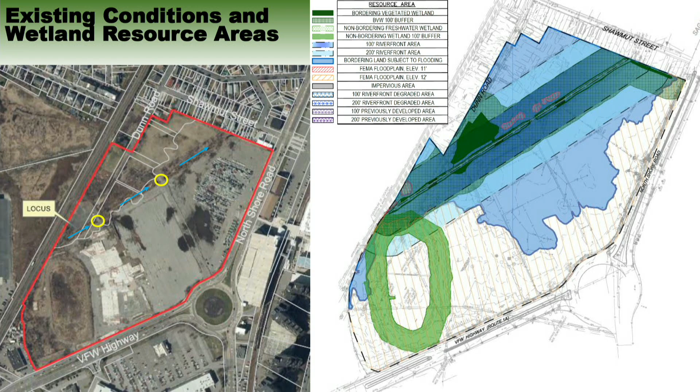So on to the proposed project here. As you see, VFW Parkway and North Shore Road and Butler Circle have all shifted to the bottom of the screen, so north is in the right direction of the screen.

You see the big white building in plan left, or the southern portion of the site. That is a podium-style building for the school, serving grades 9 through 12. Beneath the building is at-grade parking with a base elevation of 4, and the first floor elevation above that garage is elevation 19, about 7 feet above the current 100-year floodplain. That's an effort to have the first floor elevation above the floodplain and also allow floodwaters to flow beneath the school building during a 100-year flood event.

As you can see from VFW Parkway and North Shore Road, we have 2 proposed site entrances at the existing traffic lights at both of those roadways. The internal driveways loop throughout the site, providing access to the school and a series of surface parking lots.

The parking lot to the right of the school, between the school and the athletic field, has electric vehicle charging stations. The parking lot to the left, in the southern portion of the site, has additional electric vehicle charging stations. There are also more proposed in the garage underneath the school, with a total of 69 spots being accommodated for EV charging.

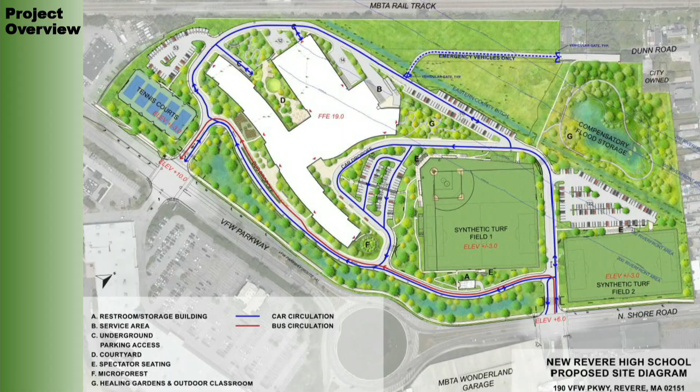Just wanted to give an example of one of the plan sheets. This is a courtyard proposed to the rear of the school. You see the school building outlined in red, and the southern portion of the school is where all the classrooms are - the extension wings of the school building. On the north side is, I believe, the gymnasium. Between that, there's a nice courtyard with a lot of plantings that I highlighted in that green polygon color. I wanted to give the commission members and any viewers a feel for the level of revegetation that we're proposing at this site.

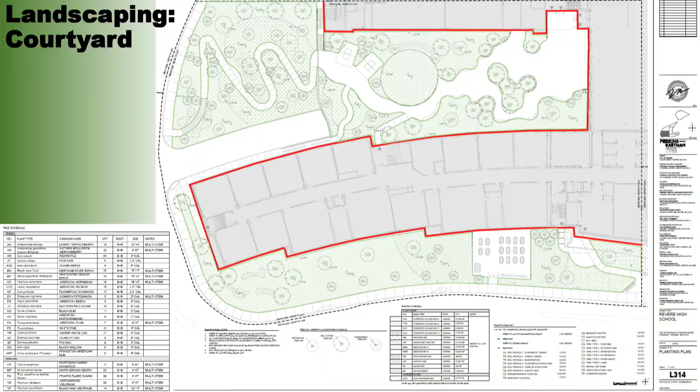Additionally, this is the natural outdoor classroom that I pointed out on the plan, on the opposite side of the Eastern County ditch from the athletic fields.

Some of the notable features I wanted to point out: the bottom left image shows one of the proposed boardwalks, 6 feet wide, crossing over some of the lower lying grades of this compensatory storage area. There are about 2 more boardwalks proposed, to allow floodwaters to enter and recede from this compensatory flood storage area from the Eastern County ditch beneath the boardwalks.

We also have the walking paths, again 6 feet wide, comprised of a composite sand that adheres to itself, so in a flooding event it would not dissipate or spread out. It would still function as a pervious area, so it's a good balance for environmental protection there.

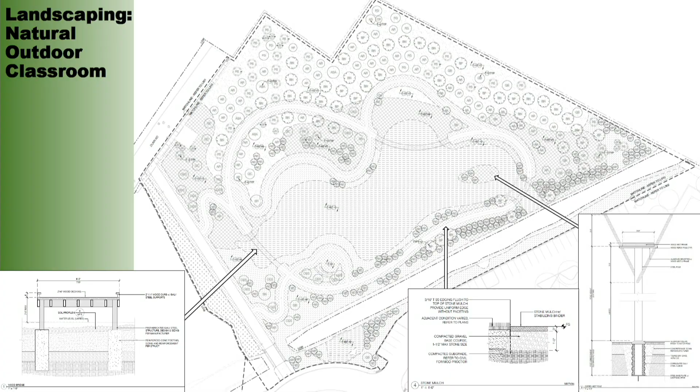And then lastly, a bit of wildlife mitigation is provided. The image on the bottom right with the arrow pointing to the deepest pocket of this compensatory storage area is a proposed osprey nest that will be constructed there. So it adds wildlife value, educational value, and overall passive recreation for folks coming to bird.

With that, I'm going to pass the stormwater discussion over to Dave for a moment.

Thank you, Claire. My name is David Conway, I'm a civil engineer for Niche Engineering in Boston. I'm presenting tonight, but I'm part of a team of about 7 engineers at Niche who've worked on this to pull together the documentation, calculations, and plans for the civil side of this project, along with Claire's team for permitting and the landscape architectural teams, working in conjunction to make this all happen.

Claire has mentioned several times for me to be brief. I'm going to talk about the stormwater in a somewhat narrative form. The materials you provided, the stormwater report, is over 400 pages. In the beginning we have a very detailed discussion about how we're meeting each stormwater standard, in addition to the stormwater form itself where you're just checking boxes, but we also have a narrative that goes through that. I'm going to talk about it a little more holistically, and you're free to ask any questions.

But the big move that was made very early, so that we could ensure we got a school the city would be proud of and would like, a healthy school, and that we would also meet all the regulatory requirements for stormwater and other resource areas, is by greening the site. The site has a lot of pavement on it right now. We are reducing the amount of impervious surface on this site by 6.5 acres. Just doing that, we're going to improve the stormwater rates coming off the site, greatly improve the recharge of water going into the site, and reduce the volume of stormwater coming off the site.

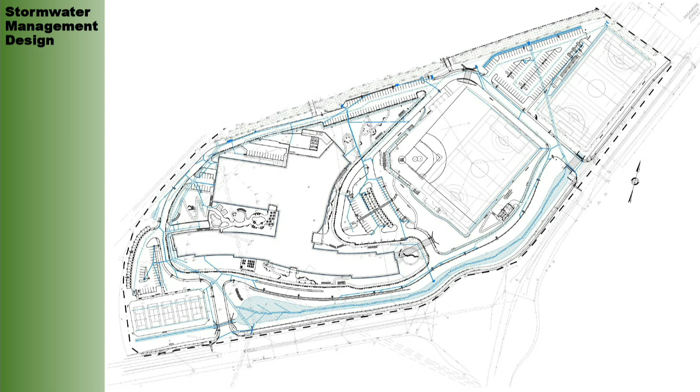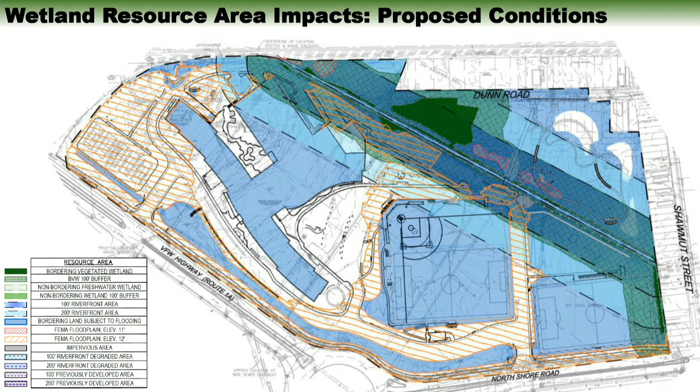The next couple of slides break out all of these resource areas so we can get a better grasp on everything. This first one shows the buffer zone impacts and the impacts to the non-bordering freshwater wetland, or isolated wetland, within the dog track. On the left of these images you'll see existing conditions, on the right the proposed. You can see the school building itself is partially within that isolated wetland footprint. That's something we came to the commission in August 2024 to discuss, going over mitigation commitments the team was prepared to provide to mitigate the permanent impact of that wetland, which I'll touch on at the final slide.

What you see in the dark green hatched line work is a portion of the school. Some internal driveways and parking areas are also within the buffer zone, but notably we have an outdoor learning classroom with a diverse landscape planting plan, replacing a lot of invasive non-native species. We have Phragmites growing into the meadow there, Japanese knotweed, multiflora rose, Asiatic bittersweet - a lot of those within the limit of work will be removed as a result of the project and replaced with this diverse planting plan. Also, on the east side of the Eastern County Ditch, a reduction in impervious area within the buffer zone should be an improvement to the conditions.

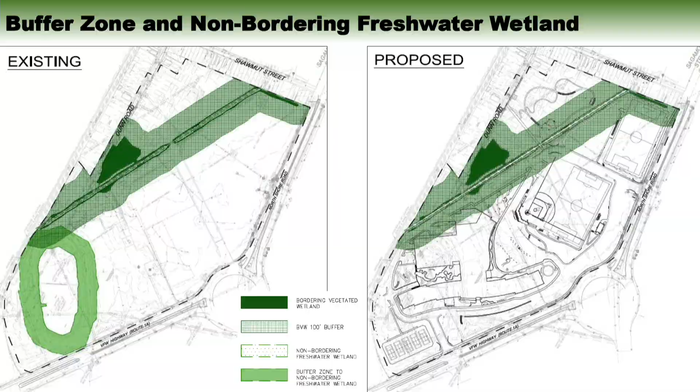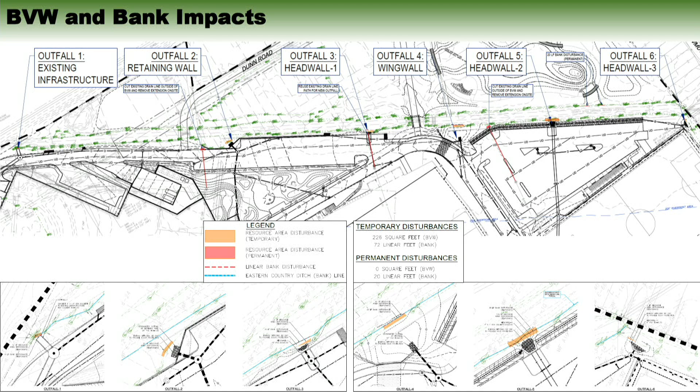So that's 20 linear feet of impacts. It does exceed the regulatory threshold for bank impacts, so we provided a wildlife habitat evaluation within the notice of intent application to comply with that standard.

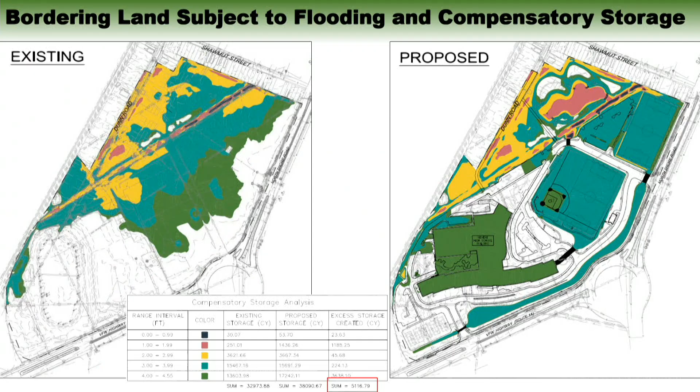When it comes to the riverfront area, that's a really good point, that in a lot of cases you can't build within that first 100 feet. But an interesting component about this site is that it has these three layers of riverfront area split out for regulatory compliance: degraded, which would be areas lacking topsoil, like pavement or gravel.

So when you're dealing with work within degraded riverfront area, the goal of achieving compliance with the performance standard is to not do any more work, or to not increase the degraded area within that riverfront area. And we really go into detail on that in the report.

So if it's easier, I can pull that text out and put it into a more condensed couple of pages rather than having you guys dig through the big document.

So I guess that's kind of my point too. I saw that and know that's obviously a law, but you explained degraded versus non-degraded—this is the first time I'm hearing about degraded versus non-degraded. So my review is going to be meaningless if I can't pull stuff like that out of the report.

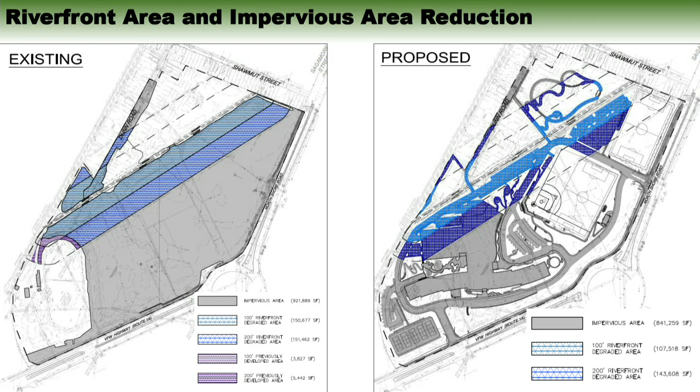This really is in conservation, but it's a curiosity more than anything. You have many areas that are designated as garden areas, and I forgot the term that you used—the natural outdoor classroom. Are they going to be lighted?

That's a great question. I don't think the natural outdoor classroom is. I'll let Emmett speak to that—he's been working on a lot of these gardens here.

Some of the major pathways will be lit for safety reasons and for circulation, but the further you get away from the building, the areas that are meant to be more natural will not be lit and are not intended to be occupied after hours. The main circulation pathways will be lit to safe levels.

Can I assume that D is going to be lit? It's in between buildings? Correct, yes. And not G? Not G, right. Thank you.

So, to one of Tom's points with the 100-foot buffer zone, and what I expressed while we were on site about what kind of treatment you'd be applying to these impervious surfaces—the parking areas that are close to the ditch—having upgrades like not using sodium chloride and things of that nature, only because I'm sure you would want to maintain the roadway that goes around the building.

It is a lot to really wrap our brains around. And I feel that we definitely need to, if you agree, continue this to really have a good look at it—have a discussion offline about how we might want to proceed with a peer review or third-party peer review of this, just to give it a little bit more.

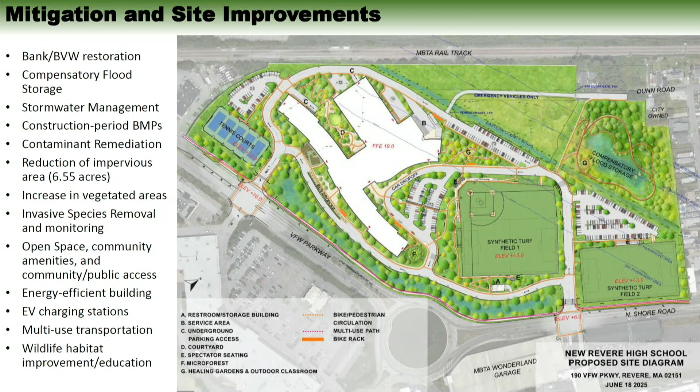Thoughts, please. Well, I think that it's overkill at this point, my personal opinion. I do understand having the additional reviews, but with the fact that they've gone through MEPA, the fact that they have a lot of eyes on them, they've done all these reports, I just feel at this point that we should be good, but I respect your opinion as chair.

I respect the opinions of others on this commission, and I don't think it could hurt anything to do the extra reviews. I just am somebody that is cost conscious, even though I know how much money this thing's going to cost—I just think it's going to cost additional money and time for the additional review. I personally think it's overkill, but I will respect the opinion of the rest of the commissioners for what they decide. My personal opinion would be that we should be good to move forward, but I will again respect what everyone else wants to do.

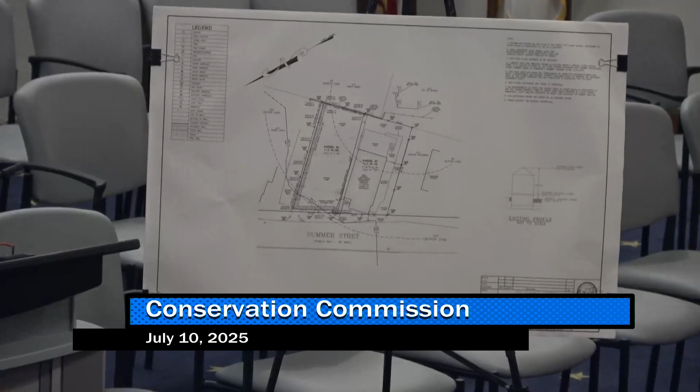Good evening, Ryan Rosine with Goddard Consulting. As you might remember, we were before you last year for the demolition of the detached garage, shed, and filling in of the in-ground swimming pool, and construction of the new retaining wall along the actual property line, giving back the neighbor a portion of their driveway.

We submitted the as-built plan, as you can see here. This here is the wall along the three sides, along the property line, so it's been restored to the property line. This whole interior area where the swimming pool was is now lawn. It's fully grown in, no concerns with erosion. That's pretty much it. I know a couple members were there earlier this week and saw it.

In the original plan, there was supposed to be a small retaining wall on this side that was not constructed. It was deemed that wall, which is a short wall, 1 to 3 feet or 2.5 feet max, didn't actually need to come down, so that was not put in.

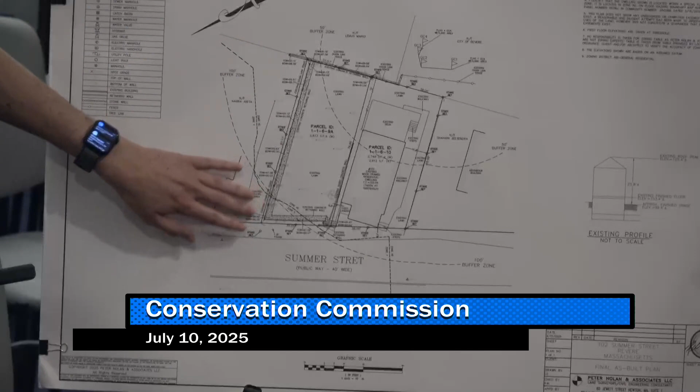The large retaining wall here is about 7 inches higher than what was originally proposed on the plans. That's a minor deviation that we feel has no negative impacts on the resource areas. So I'll turn it over to you guys if there's any questions or comments.

Thank you very much for meeting with us on site and walking it down. I can definitely confirm to the other commissioners that the site is completely stabilized. Grass has grown in, the retaining wall is up, and the retaining wall on the back with their neighbor is up as well. Where they abut the neighbor behind them and closer to the marsh, that one's all in.

And the driveway on the other side, where they gave back to the other property, is stabilized with crushed stone instead of permeable pavers on that part of the property. So it is all stable. It is the retaining wall. They did what they said they were going to do, aside from the 2 drains that were supposed to be there, but the amount of open space in the blocks, I think, would more than make up for it.

But I definitely have some concerns about the spacing on the blocks and the layout and construction of it. I have some concerns, and I'm sure others who have seen it may have similar concerns. But at this time, I'd like to open up to any other commissioners if they have comments, questions, or concerns.

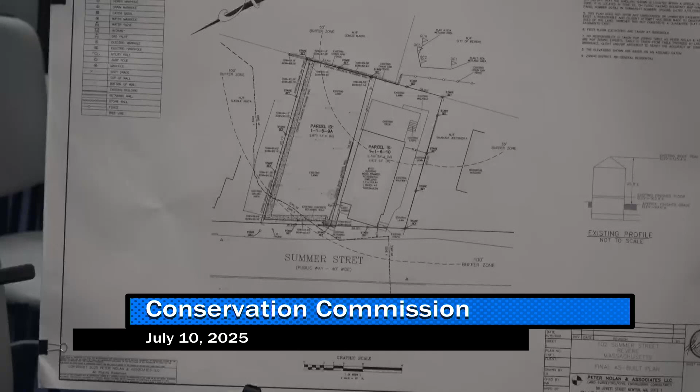Is it there for a reason? Does it drain all the way down to the ground? The blocks below it, the top ones are much more solid and just have that smaller opening at the top. The ones below, like the 2nd, 3rd, 4th levels down, have much bigger openings in the middle, so they're more surrounded and filled with the aggregate. Because those are open from the top, water can percolate all the way down through those most likely.

Well, I wish there was a solution. I would like to not have that be a trash disposal, but you'd want that to be something that's porous too. What if they put wire caps? There's porous concrete too, but I don't know if that would work fast enough.

The wall manufacturer makes a cap, I think it requires a cap. I think the wall manufacturer does make caps for those, but I don't think that was part of the original plan to have them. I don't believe the original plan called for caps on the top, the plan that was approved. Actually, I think I did mention that, but anyway, it's not a big deal, but it is kind of unfortunate.

No, I understand. Yeah, I did see that some of the wall looks beautiful. Yeah, no, I agree, it looks better. But I did see that trash, and it's unfortunate, but it can get cleaned up, and it's something the homeowners might have to deal with occasionally. Yeah, heck, I'd even put something porous and then dirt on it and put some plants there, put some screen so they can't do it.

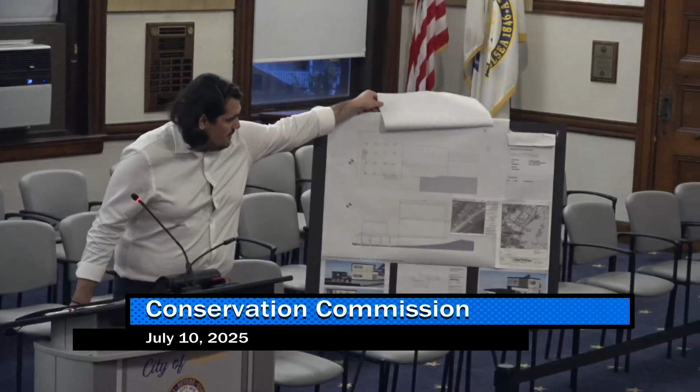Here we have a map from it. And there will be a sediment control barrier to prevent sedimentation. Please let me know if you have any questions.

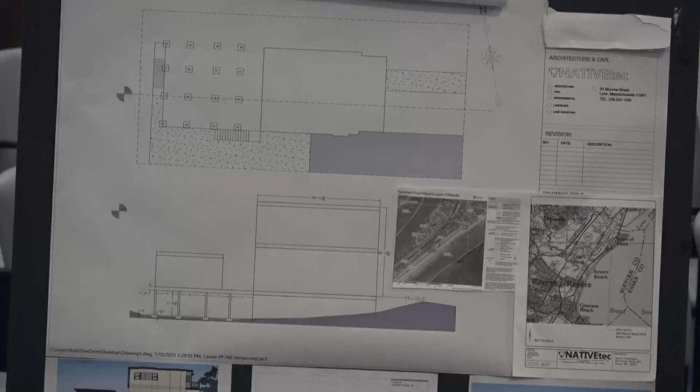So when we were walking down the site, the back of the foundation, the front of the house, you said was 15 elevation. What was the back of the foundation? 6.5. Okay, that's definitely something. And that drawing you have with the curve coming down, that's the one there.

Yeah, if you could point out where the end of the foundation is, please. Where is that at? It's there. Okay, and then the addition, those pilings there, that's where you're going to have your apartment, correct? It will be elevated on the pilings.

Okay, when we walked down the site, was it the building commissioner? I'm not really sure who asked to remove the drains. What is the plan for that, and what kind of excavation do you have to do? They will be removed, both of them. Okay, what's the plan? How are you going to be doing it?

You're in a pretty low elevation, just making sure everything's fine. Do you have an idea of where the drainage system goes? Rob Rainey, NATIVEtec: the drains will be removed, and 4-inch depth of water washed stone will be put down on the expanded footprint.

So the now footprint of the apartment and the deck between - the owner wants to keep a gap between the existing house and the new apartment that's now raised.

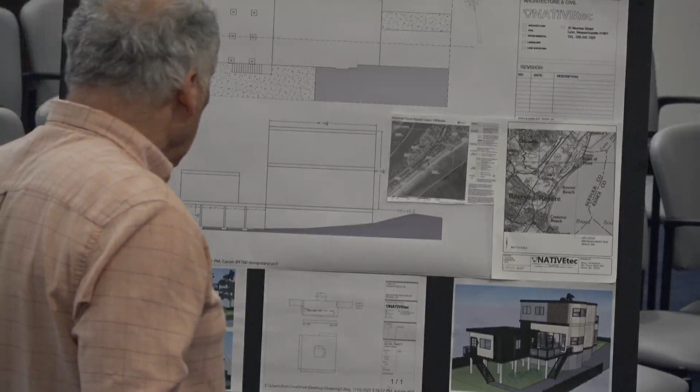The connection between the two? Yeah, so the deck you're building between the apartment and the main house, is that like a shared space? This deck here is the main building, and the apartment would exit here on the other side.

And that'll all be slatted so the water can go right through the deck? Okay, alright, I think that's all the questions I have. Thank you for the elevation update. Any other questions for commissioners?

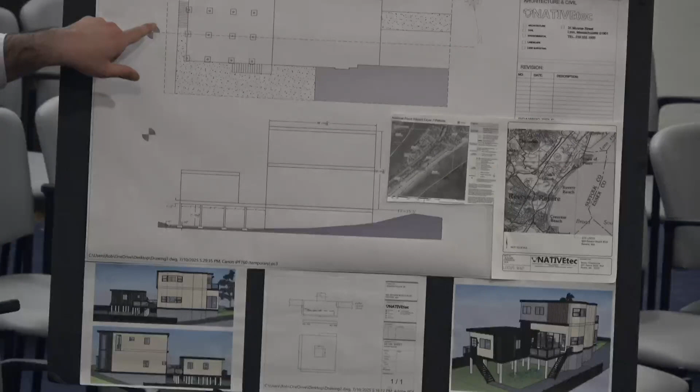Just looking at the drawings of it, is that an ADU in the back? Is that what that is? What are we talking about? So is that, are you filing that as an ADU?

It's been that way, it's been a two-family since she bought it about 4 months, 3 months. If you wouldn't mind going up to the microphone - she bought it about three months ago. So it is currently a two-family? Yes.

Okay, the apartment is part of the current foundation, and it's at ground level in the back, so the elevation of that floor is probably about 6 or so. Now they want to take the apartment away from the main foundation of the house and put it on pilings. I think the way it's connected by the porch, so it's all one piece, instead of being an accessory dwelling unit.

I just have one thing to say - as someone who's lived there, two homes from me was put on pilings, and I was there when they pounded these things into the ground. My home, 2 houses away, shook like crazy, and there was no notification - I didn't know what was going on. I just want to make sure that when you do this, you let the homes around you know this is going to happen, because it was shocking - I felt like I was in an earthquake.

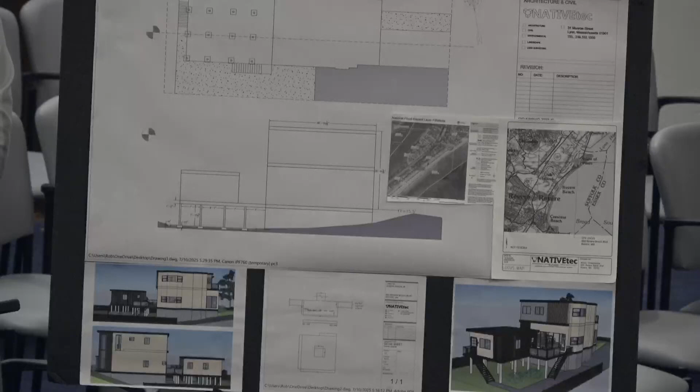Wait, so your foundations aren't even going to be below frost? Is that what you're saying? Well, they're basically like a mat foundation for each one. You're not worried about frost heave? It's basically a mat foundation, and it has a spread to it for that purpose. Okay, I mean, it's not our purview, that'd be building, but interesting.

Okay, any other questions? Yes, go ahead, Mr. Chairman. In the back right now, there's a small porch, correct? Yes. And the foundation you're talking about is not going to encompass that porch at all? No, it won't be passing. As a matter of fact, that porch where it exists now is more or less where the connection is between the front building and the rear building, the same area?

Yeah, as it stands, it has a small porch and an apartment below that is ground level. You can see the windows when you go into the backyard around it. But yeah, they have just an exit way off the back there.

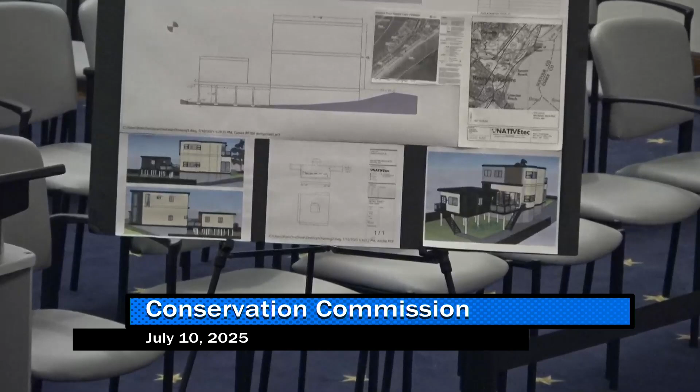And I noticed underneath is green. Is that AstroTurf, or is that just aesthetically put there underneath the addition? It will be sand and... well, it exists as grass. That's grass there now, it's sodded, but it'll be water washed stone. Okay.

And the driveway on the left side of the property when you're facing it, is that going to stay as is, or did you have any resurfacing or repair planned? I didn't see that in the plans. That's all gonna stay as is? It is, yes. Okay, I just wanted to make sure you weren't going to pull a fast one on us again.

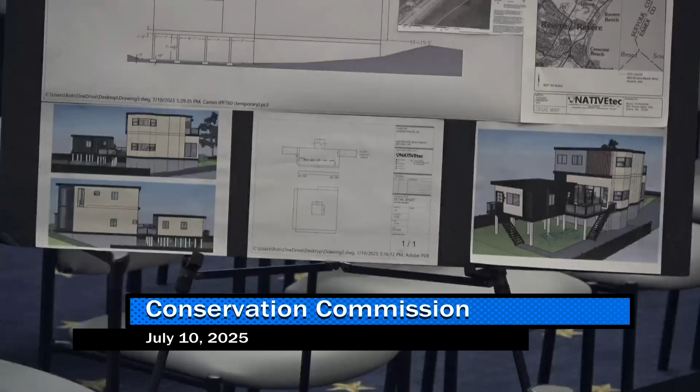So at this time, I'd like to make sure our commissioners don't have any more questions, first off, and open it up to the audience if they have any comments, questions, or concerns about this project. All right, seeing none,

I'd like to call for a motion to close out the hearing. Motion to close out the hearing. Second? All in favor? Aye. Excellent, thank you so much. Moving forward, thank you very much. You have everything, you have all your things in a row.

It kind of looks like an accessory dwelling unit, but I get the porch in between kind of connects it. It really has that accessory dwelling unit feel. Yeah, it really does, but,

As it is, the other thing I would make sure is that all the i's are dotted and t's crossed on this one. I want to make sure it doesn't affect anything there. Were you able to get to the site plan review with this yet? No, I think Monday the owner decided to create this gap even a little further. Yeah, because the original architect made these revisions here, like, this is the last night, but we'll try to get to that. Yeah, the holiday week, I didn't think you guys were going to get to it, but as it stands, as you have shown us today, we'll let site plan review take the rest of this one,